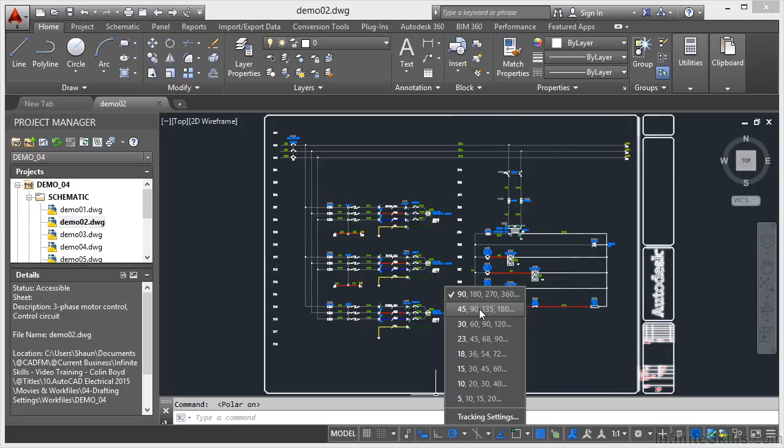If I click on this arrow here, this allows me to choose angles that I want to set for my polar tracking. You can see we've got some default angles there. If I go to tracking settings, the default increment angle for polar tracking is 90 degrees. I'm going to leave it at 90 degrees and click OK.

I'm going to zoom into the same spot in the drawing again, and utilize my polar tracking to draw a line. What's really neat about polar tracking is it gives you an on-screen heads-up display, providing you've got your dynamic input switched on, which I have. If I go to the line command, home tab, draw panel, and click and drag horizontally, can you see it's telling me I'm at 0 degrees for polar tracking, and that little dynamic input box is telling me how long I'm moving along that 0 degree line from the first point. So I can put a distance in of say 4 and press enter, and I've drawn a line 4 units long at 0 degrees.

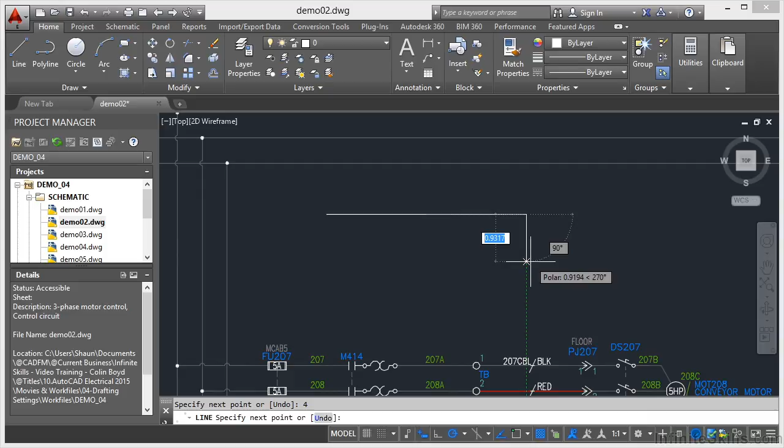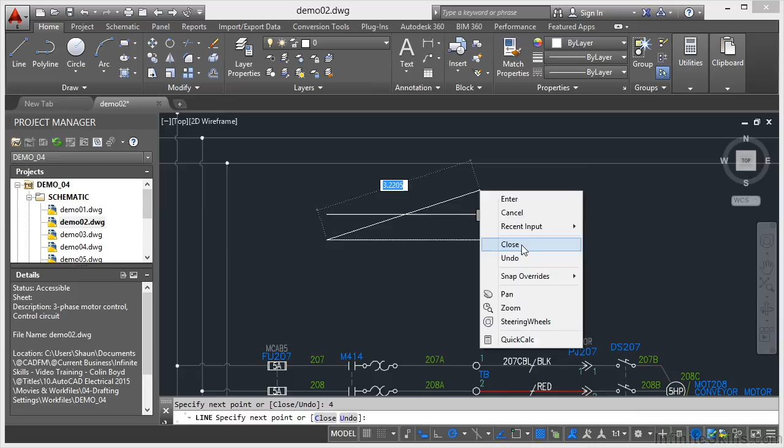If I come vertically downwards now, can you see how polar kicks in at the next tracking angle, which is 270 degrees in this case? As I come down I might only want that to be, say, 0.5. Press enter, and I'm getting exact distances and exact angles. As I come along this way, if I move at 180 degrees and type in 4 again and press enter, all I've got to do then is right-click, close the line, and I've got a rectangle. It's made up of separate line segments, sure, but each is drawn exactly at the appropriate degrees and distance. That's what polar tracking is all about.

Now, the distances that I've input there are known as direct distance entry. So as long as you've got an angle, you can place a line at that angle using a direct distance. What I've done there is use the default 90 degrees.

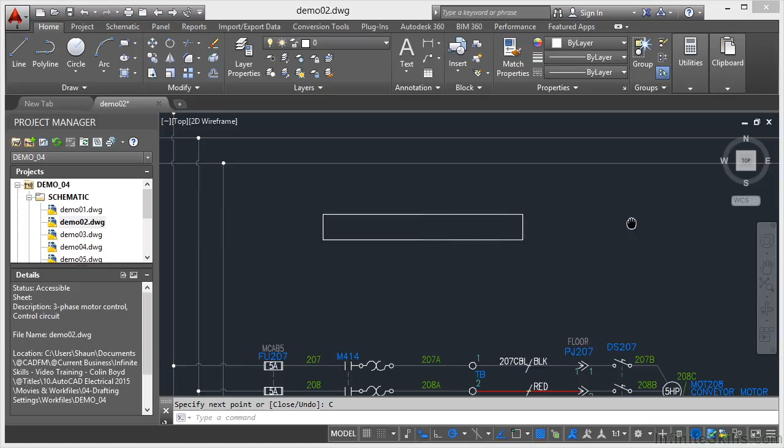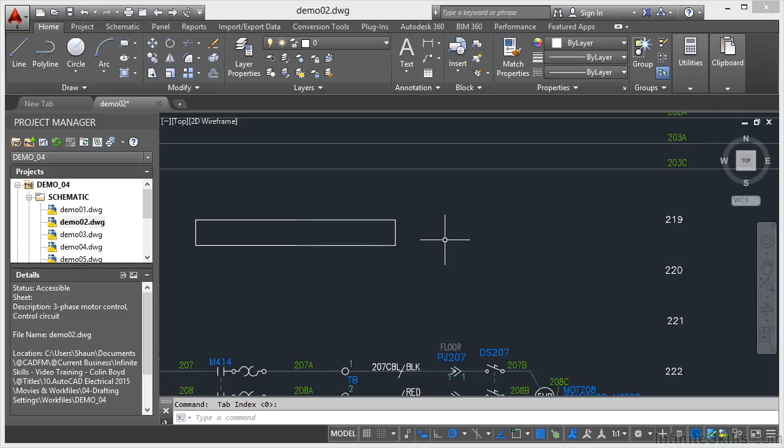What would happen if I used 45 degrees instead? Let's just pan across a little, utilizing this space here. I'll come down here, click, and go to tracking settings again. I'm going to change the incremental angle now to 45 and OK it. Now I will still get 90, 180, 270 degrees, because they are increments of 45, but I'll also get 45, 135 degrees, and so on. So let's see what happens there.

Let's go back to the line command. Again, I can click here, but now look, I get 45 degrees. So if I want to go 1.5 in the distance box at 45 degrees, there's my line. If I come down this way at the opposing 45 degrees, which is 315, and type in 1.5 again, what I can draw here is an exact diamond. Can you see that? 1.5 again, and then all I've got to do is right click and close that.

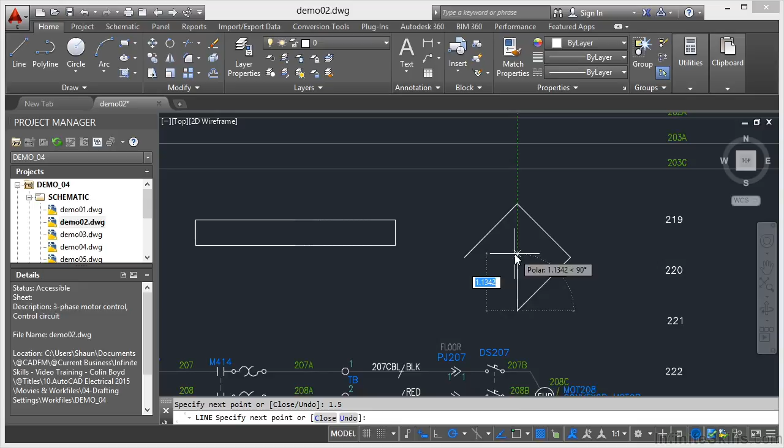We now have a perfect marker for wire numbering connectors on our AutoCAD Electrical drawing. We can then convert that to a block, add that to the database and use it as a marker or a connector or anything. This perhaps could be a panel plate showing the text and naming of the panel. So all of these tools can be used within AutoCAD Electrical to make you more effective and more productive.